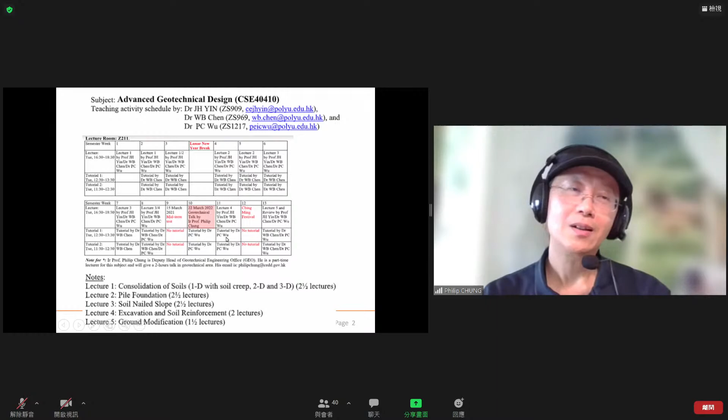Because he had already spent 5 more years than his classmates. Yeah, but anyway, his development in our office is very good, and he's actually the first one of his batch of graduates to be promoted to senior geotechnical engineer. Yeah, I saw his title. Yeah.

Actually, most of the graduates of his year, 2010 I think, most of them are geotechnical engineers. He is the only one that got promoted, after only 5 or 6 years of service in the geo. A very quick promotion, very quick.

Yeah, actually he's very smart. And Coco Yu, the graduate I mentioned to you, she graduated from Oxford University. Oh, Oxford, yeah, from Oxford. I also asked her, well, you studied a PhD for 5 years in Oxford, why join us as a graduate? She has to start from scratch, and undergo 3 years training and then 1 year in a responsible post before she can attend the chartership exam.

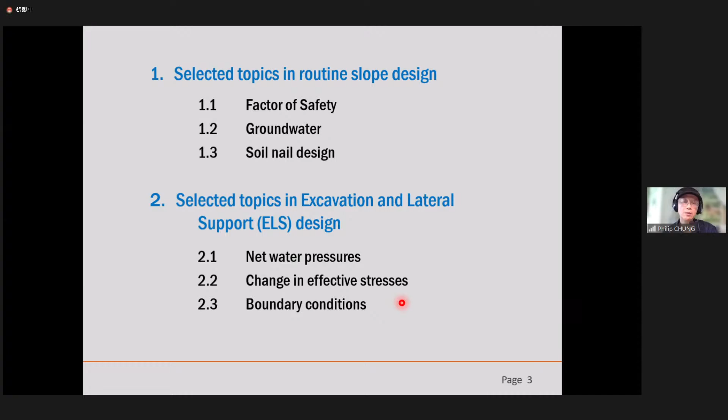In fact we use software in our routine designs, but there are many tricks. If we don't specify correctly, that will affect the reliability or accuracy of our results. All right, so that's the outline of my talk today. I plan to spend about 1 hour and 45 minutes on these 2 topics, or 6 subtopics, and leave the last 15 minutes open to all students for questions and answers.

All right, the first topic on routine slope design. Before I talk about the 3 subtopics, I first list out the standards and guidance for your reference, so that after you graduate from the Polytechnic University, whether in civil or geotechnical field, don't be panicked - there are lots of manuals, lots of guidelines to guide you on the design.

Here for the slope design, the Bible is the Geotechnical Manual for Slopes. I'm now actually responsible for updating this manual, the Geotechnical Manual for Slopes, and I will spend the next 2 or 3 years updating the whole manual.

In Hong Kong, according to the Hong Kong law ordinance and other regulations, all slope designs must be compliant with the Geotechnical Manual for Slopes. And if your slope is alongside the highways, we also have the Highway Slope Manual. We also have a series of Geo Guides relevant to slope design, listed out here.

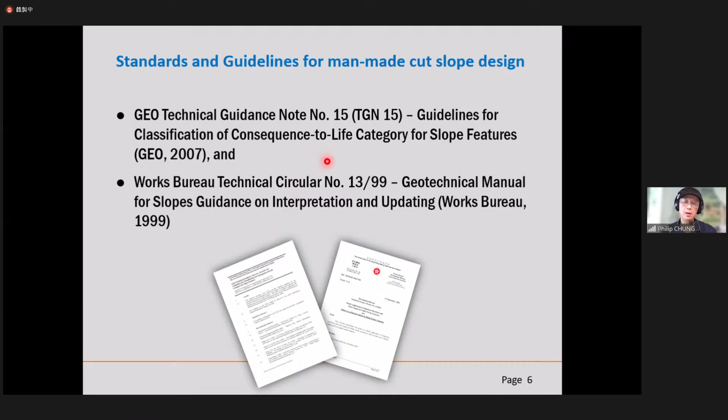Especially Geo Guide 7, which is a guide to soil nail design and construction. We also issue lots of technical guidance notes which supplement the Geo Guides and the Geotechnical Manual for Slopes. Some of these technical guidance notes or technical circulars actually replace the contents of the Manual for Slopes and all the Geo Guides. So we have lots of these Geo Guides.

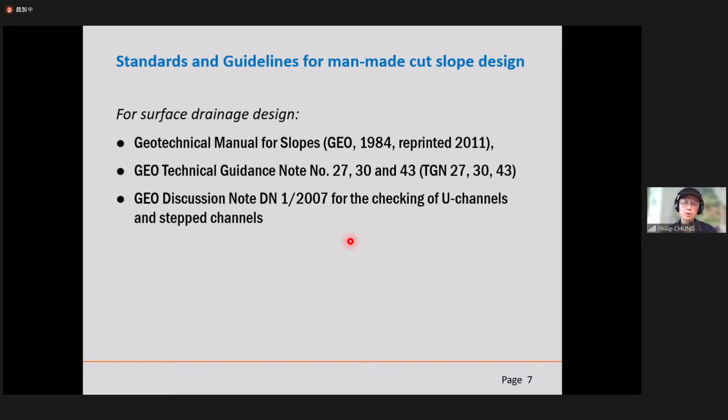On surface drainage design, we also have other reference documents. So there are lots of documents and guidance documents in hand to facilitate or guide you throughout the design process. Now let's first discuss the first subtopic I selected, which is the factor of safety.

First of all, the factor of safety of a slope, if you are engaged in slope design. In university, you are taught how to analyze the stability of a slope, normally through the limit equilibrium approach. That is, you may use the method of slices, whether it's Bishop's method, Janbu's method, Morgenstern and Price method, etc. You can finally come up with a factor of safety which indicates the stability of a slope.

In the design, you need to compare this analysis with a requirement: what is the required factor of safety for a particular slope? That is the minimum factor of safety required, and it is stipulated and specified in our Geotechnical Manual for Slopes. I would like to share this with you now.

But before I tell you what the minimum factor of safety required will be, you need to understand the concept. Our slope management and engineering design in Hong Kong is based on a consequence-based system. Now what does it mean by consequence-based system? I suppose most of you have heard about the term risk, right?

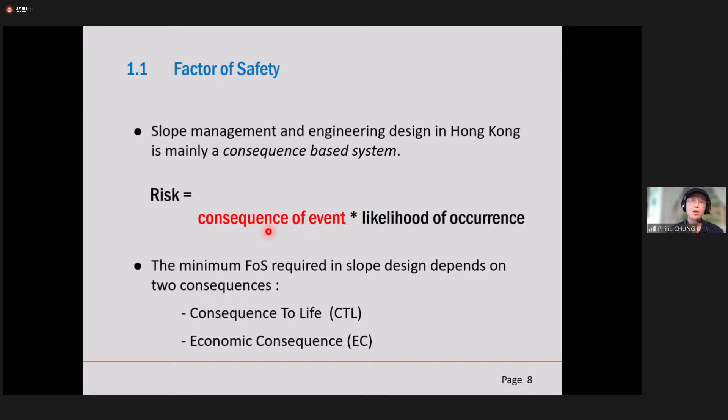So that's the requirement in Hong Kong for slope design. In the coming slides I'll show examples of category 1, under CTL, and also economic consequence category A. If you go to GEO Technical Guidance Note 15, there are lots of examples for the 3 different categories, but for the sake of explanation I'll only pick some examples to illustrate the important facilities under category 1 of CTL.

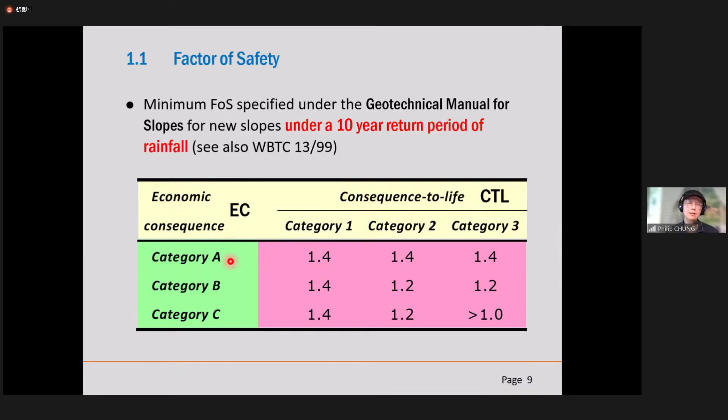Another slide shows examples of economic consequence - that is, should the slope fail, it would suffer economic consequence in this way. If the failure affects buildings causing excessive structural damage, or affects essential services, or major roads, etc., then this falls into category A of economic consequence. So in simple terms, if your slope affects important facilities - that is Cat 1 or Cat A - then 1.4 is the minimum factor of safety.

This is the first part about the practice in Hong Kong to specify the minimum factor of safety of your slope, and this shows examples of slopes. In Hong Kong, it's very common to have large slopes in close vicinity of buildings or major roads. Even though some of our slopes are not very high, especially compared with the scale in other countries or mainland China, because of their close proximity to facilities, buildings, and roadworks, a failure will affect the loss of lives and properties - and this is simply not acceptable.

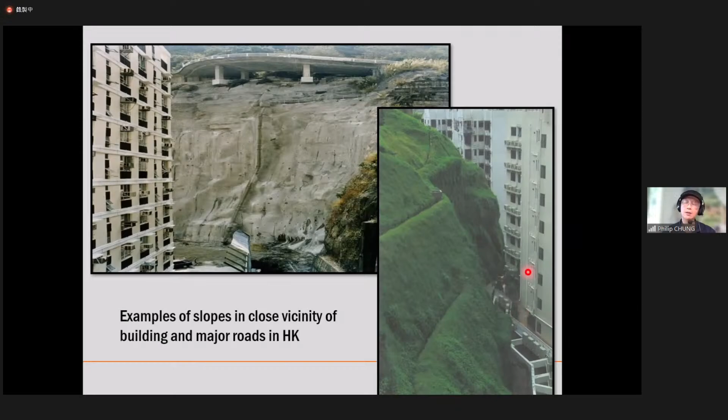Now we know the concept of categories, which we use to define the minimum factor of safety. But there's one more aspect to think about in practice: should the slope fail, would the failure debris affect facilities near the slope crest and/or slope toe? Even if my slope is overlooking an important facility, like a multi-story building, if the failure debris cannot actually reach the facility, why should we classify this slope as category 1? Even though the slope fails, it doesn't bring a concrete effect or damage to the facilities. So this comes to another concept - the travel distance, or in other terms, how mobile the failure debris is.

This depends on two things, which I'll show you later. One is the type of slope - whether it is a cut slope failure or fill slope failure. The second is the volume of failure.

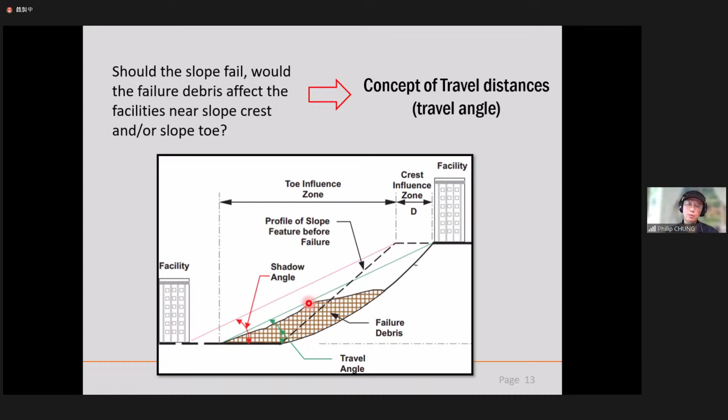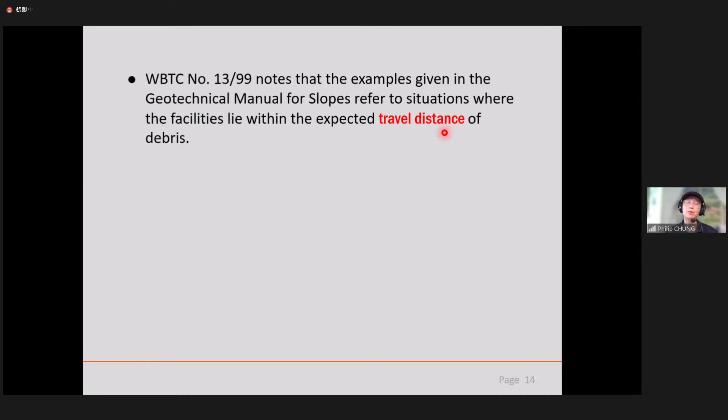In fact, all those examples, and also the table I showed you, refer to the situation where the facilities lie within the expected travel distance of debris. That is, when we say this slope is Cat 1, we have an implicit assumption that if the slope fails, it will affect the facility. So we expect the facility to lie within the expected travel distance. Now this is our implicit assumption.

But in fact, if your facilities, after estimating the travel distance, lie beyond this travel distance, then your category can be downgraded by one order. Initially, after initial assessment, you assign your slope as Cat 1, but later, when you find the facilities in fact lie beyond the expected travel distance, you may downgrade your category to 2. Now this may have a knock-on effect on the minimum factor of safety required. For Cat 1 it must be 1.4, but if downgraded to 2, it could be 1.4 or 1.2, depending on the economic consequence.

Now I want to emphasize this term, expected travel distance, because we have another term in the third bullet point, called extreme travel distance. So we have two travel distances: one is expected travel distance, the other is extreme travel distance. If your facilities lie even beyond the extreme travel distance, you can further downgrade your category to Cat 3. So your task is: once you have an initial assessment, say if it is a Cat 1 slope, your slope has to be designed for at least a factor of safety of 1.4, but please check the expected travel distance and extreme travel distance. In the coming few slides I'll show you how to check this.

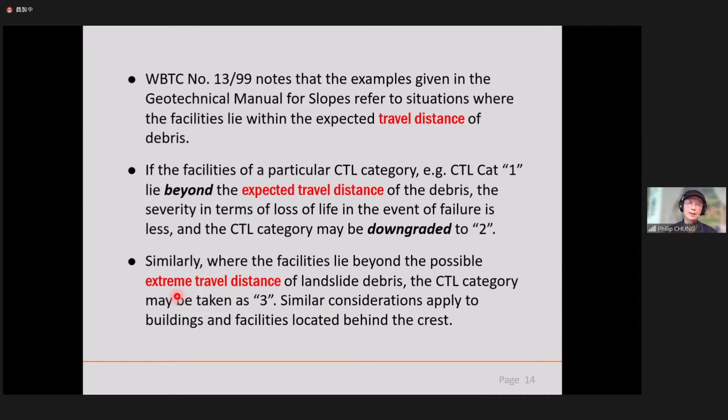For cut slopes, there are open circles showing the expected travel distance. Remember we have two travel distances: one is the expected, nominal one; the other is the extreme one, unlikely to happen. Expected is the lower bound, extreme is the unlikely case.

So the expected travel distance for cut slopes, we take as 35 degrees, and the unlikely extreme one is about 25 degrees. For fill slopes, shown as squares and black circles, they are more mobile, especially fill slopes that failed under liquefaction—very mobile. Our expected travel distance is about 25 degrees for fill slopes, and only 15 degrees for the extreme travel distance.

We have also seen that it depends on the volume. Based on judgment, we choose 300 cubic meters as a division line. This is what we call a relatively smaller volume, and larger than 300 is a large volume.

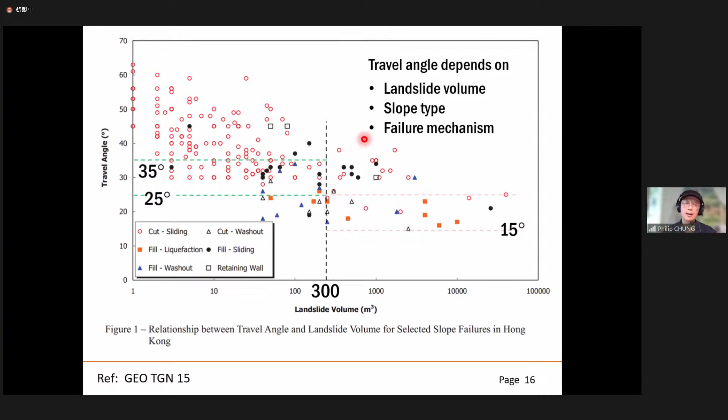With all this in hand, we can set up this guidance table. You can look up this table in our Geotechnical Engineering Office Technical Guidance Note 15, which gives you the travel angles of your slope. It consists of two parts.

The first part is the expected travel distance, and the second half, the lower half of the table, gives you the extreme travel distance.

So for your slope, see whether it is a cut slope or fill slope. If you're designing a cut slope, see what the debris volume would be if your slope fails. If the debris volume is smaller than 300, then your expected travel distance is 35 degrees, so you can draw a 35-degree line from your slope crest to see whether it will hit the facilities. If your debris volume is larger than 300, then you have to pick up 25 degrees, etc.

After checking the expected travel distance, you may then check the extreme travel distance to see whether your category can be further downgraded. Again, depending on whether it's a cut slope or fill slope, and depending on the volume of debris, you can look up this table to see which number you're going to adopt in your design.

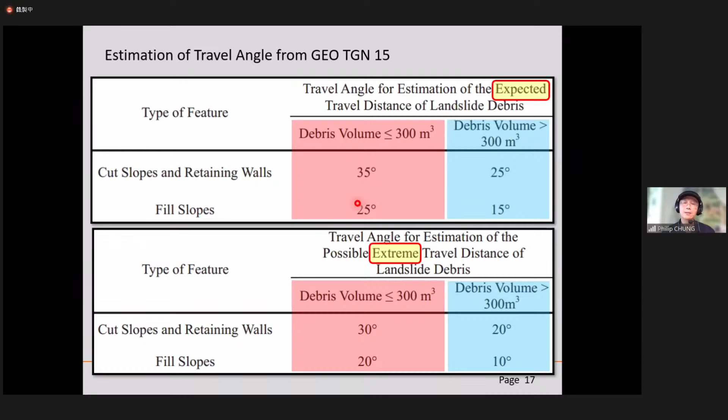Now, these are the ways we specify the minimum factor of safety. I think you have a copy of my PowerPoint, so to test your understanding of what I have just explained, I actually set up this quiz.

We have a cut slope with a slope height and also the clearance of the slope toe to the 6-story building. The question is, what will be the minimum factor of safety required under the current Hong Kong standard? You need to see that my slope is overlooking a 6-story building, so which category will it be?

And hence you look up the table - what will be the minimum factor of safety? Then you have to estimate the expected travel distance and extreme travel distance, to see whether we have a chance to downgrade or not. So you can go over the previous few slides to see whether you can come up with an answer - what will be the required factor of safety?

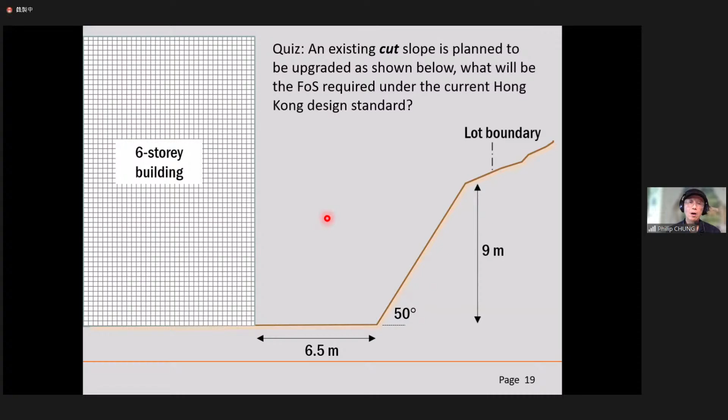All right, this is the first part about the minimum factor of safety. But before leaving this, I would like to draw your attention to some interesting features regarding the use of factor of safety in slope stability analysis.

Now, unfortunately, I don't have time to go over the details of these interesting features with you, but I just list them out here for your own reflection. When you have time, please think about this.

But the first thing I would like to point out is, do you know exactly the definition of factor of safety in slope stability analysis? This is also a question I ask candidates applying for the Hong Kong IE chartership exam, or in interviews in the recruitment exercise for graduate posts in government. Do you know the definition of factor of safety in slope stability analysis, the normal definition? Now, this is not the very special definition used in finite element method of analysis - this is the common definition used in limit equilibrium method of analysis.

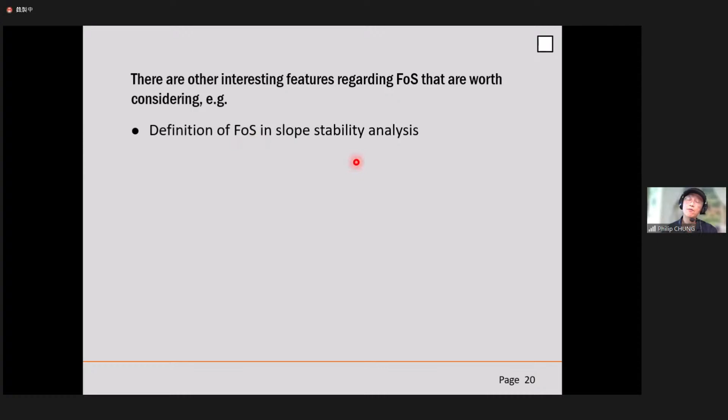So my question: in slope stability analysis, please be clear what definition you are actually using in defining this factor of safety. In fact, there is one common definition. Theoretically, according to this common definition, the slope will fail, or start to fail, at what we call incipient failure. At the start of failure, the factor of safety is 1. That is, if a slope has a factor of safety less than 1, then the slope fails.

But in fact, it is very common that we do analysis on existing slopes, to see whether they have sufficient minimum factor of safety or not. If an existing slope doesn't have sufficient stability, we need to upgrade it to the current standard. Now, we did a lot of analysis on existing slopes, and we noticed that many give a factor of safety less than 1. But most of these slopes are standing there without any failure at all. So this contrasts with our definition of factor of safety.

Do you know why? In fact, there are at least 5 to 6 common reasons to explain why a slope with a factor of safety less than 1 still stands without failure. If you are asked why, can you tell us at least 2 or 3 reasons? Undergraduate or postgraduate students should be able to give 5 to 6. Now, can you give us 2 or 3? This is the second point.

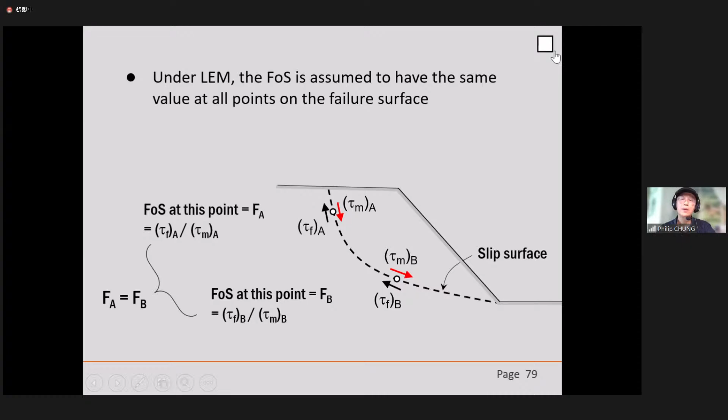Now, my question is — this is a very fundamental assumption in limit equilibrium analysis of slopes — why should we make this assumption? Is it true or valid? I can tell you the answer now: of course the factor of safety must not be the same at each point. I can tell you right away, as we can see from more sophisticated analysis, for example finite element methods and other numerical methods, factor of safety in fact changes from point to point. So what is the factor of safety that is given?

And the last one, a minimum of 1.5. Another slope gives you a minimum factor of safety of 2.0. Will you say that the slope with a factor of safety equal to 2 has a lower probability of failure compared with the one with a factor of safety equal to 1.5? Will you say that?

Now, I can tell you, you can't. Factor of safety alone cannot give you a full picture of the probability of failure. Then why on earth do we in our routine design only focus on factor of safety, but not the probability of failure? These are interesting features regarding factor of safety that, if you are interested, as an undergrad or postgrad, you can think about this.

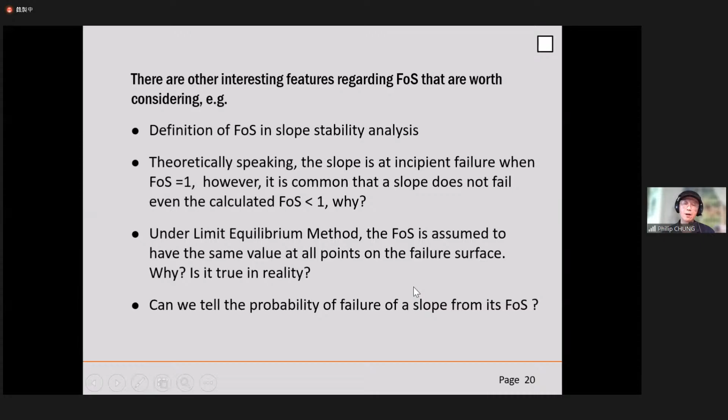So much for factor of safety. Now we turn to the second subtopic. In the table I have shown you on the minimum factor of safety, that depends on the categories, Cat 1, Cat 2, Cat 3, or Cat A, Cat B, Cat C. In that table, there is a note in our geotechnical manual for slopes, and also in the Works Bureau Technical Circular, which supplements the part on the geotechnical manual for slopes.

There is a note we particularly add in. What is this note? In addition to the minimum factor of safety of 1.4 for Cat 1 slope, this 1.4, as I said, is actually defined based on a 10 years return period of rainfall. On top of it, if you are designing a slope falling into category 1, you need to satisfy this minimum 1.4 factor of safety.

But yet, there is an additional requirement that you need to check the stability has a factor of safety of at least 1.1 for the predicted worst groundwater conditions. What does it mean? This 1.4 is satisfied if your analysis is based on 10-year return period of rainfall. That is, your design groundwater, which affects the pore water pressure, is coming from the 10 years return period of rainfall.

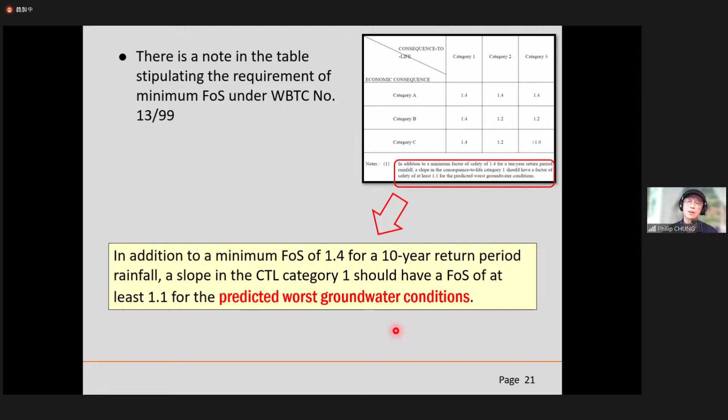That's why here comes my second subtopic on the design of groundwater level. This slide serves as a very brief introduction to remind you of the importance of pore water pressure in the stability of slopes. I hope most of you have learned the role of water pressures, especially when you learn the principle of effective stress. We use effective stress in obtaining the shear strength of soils, and that effective stress will be governed significantly by pore water pressures.

Here I show you an example: in an infinite slope analysis, infinite slope means a very long slope with constant angle, and the failure surface is shallow compared with the length of the slope. From an infinite slope analysis, depending on whether my soil has only cohesion, only friction, or is a C-phi soil with cohesion and friction, and depending on whether my soil is dry — that is, the groundwater level is located below the slip surface — or fully submerged, fully saturated with seepage, because this is sloping ground, when there exists water, there will be seepage.

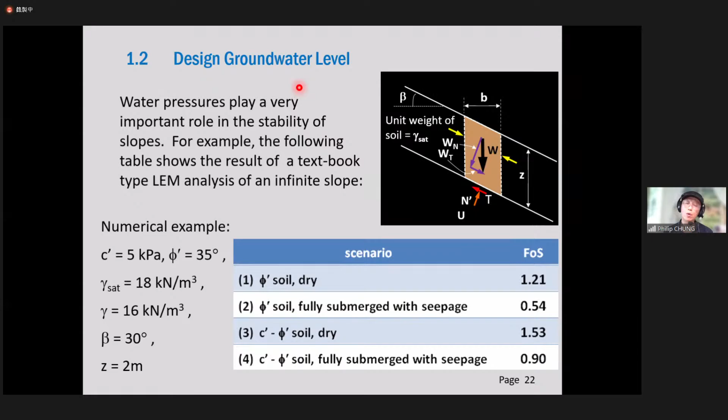So this groundwater estimation is very important in slope stability analysis. What is the standard or requirement on groundwater level in slope design in Hong Kong? In Hong Kong, the standard is very simple, just one sentence, which I highlight here.

Slopes in Hong Kong are designed for the groundwater conditions that would result from a 10-year return period rainfall. That is the requirement on the groundwater level. Now, for most new designers, they don't know how to do it. What I need is to design the groundwater level, but the standard tells you that you need to design your slope to cater for a 10-year return period rainfall.

I hope you have some concepts about return period. 10 years return period rainfall, in Cantonese, 10年一遇. You can imagine if you have to design for a 100-year return period rainfall, the rainfall intensity will be more significant, larger than a 10-year return period rainfall. In Hong Kong, we need to design for 10 years return period rainfall.

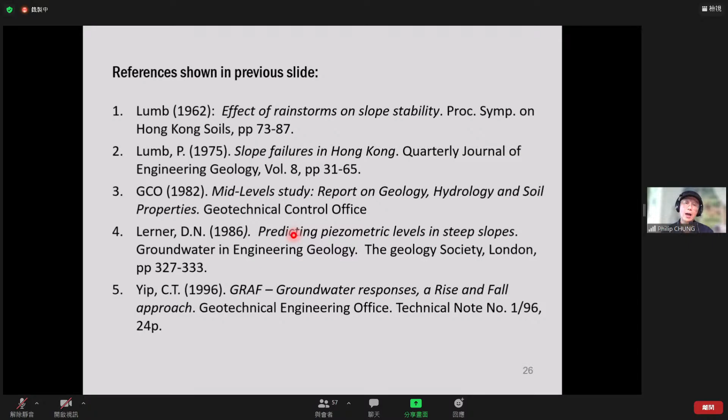Nowadays, we have 3 more commonly used methods. They are rough, approximate methods, suffering from many limitations, but yet they are analytical methods. I list out the references here. So if you have the chance to be involved in a real design, you may need to look up these 3 methods, which of course I won't cover here because of time.

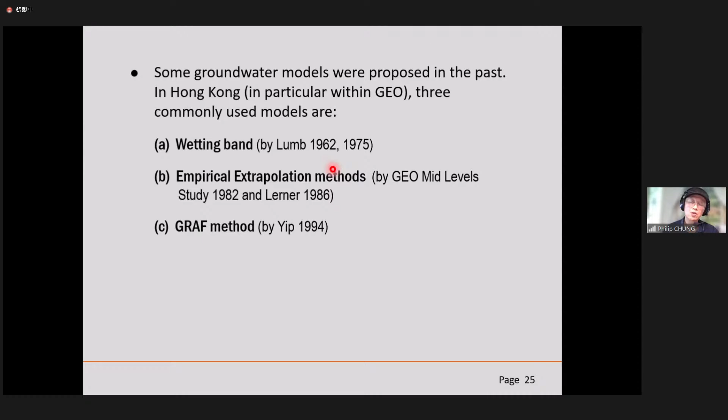Anyway, this is the design groundwater table. Now, I would also like to draw your attention to the fact that in addition to the main groundwater table, we need to pay attention to the possible occurrence of a perched water table. By perched water table, it means it is not the main groundwater table, but because of the contrast in permeability of different soil strata - for example, if you have porous material on top of less porous material, then upon heavy rainfall there may be a temporary buildup of water table because of the contrast in permeability. This is a temporary buildup of perched water, which is what we call a perched water table.

So in essence, in each stability case, you need to consider whether your geological model will allow a perched water table or not, because it also affects the factor of safety calculated. Perched water table.

I would like to share one interesting observation. I arranged a benchmarking exercise last year. What is this benchmark exercise? I invited the major local geotechnical consultants in Hong Kong to participate. I prepared 3 slope cases and asked them to work out their method of slope stability analysis.

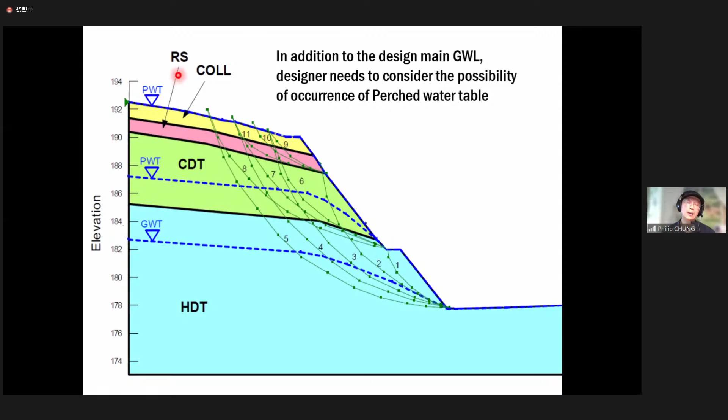For example, here I have 4 layers: residual soils, colluvium, completely decomposed tuff, and highly decomposed tuff. This is tough - how do you estimate the shear strength parameters, that is the c' and phi' of these 4 strata? Of course, most of them estimate the parameters from triaxial tests, from laboratory tests, but for the same triaxial test results, different people will interpret different results.

So we want to know how they interpret this. Thirdly, how do they estimate the design groundwater level? I organized this exercise last year and invited the major consultants to join, including AECOM, Arup, CM Wong, ESA, Fugro, Golder, Halcrow, Jacobs, Lambert, Mannings, and Maunsell. They are the main key players now in the geotechnical field in Hong Kong. I also invited 2 internal teams from GEO, one from our geotechnical projects, one from our landslip preventive measures project, so we also invited in-house people to join this benchmark exercise.

There are many interesting findings from this benchmark exercise on slope design, but because I'm discussing design groundwater with you now, I will just show you how they estimate the design groundwater in the next 2 slides, which is interesting.

In one slope, where the piezometer showed no readings of groundwater - that is, the main groundwater is well below the slope toe - those consultants and in-house designers opted to use empirical methods. Most of them chose the 1/3 slope height as an empirical rule, assuming the groundwater rises up to 1/3 of the slope height. Some used an empirical method by adding 2 meters on top of the piezometer tip, which they call the maximum groundwater level, so they add 2 meters on top of it.

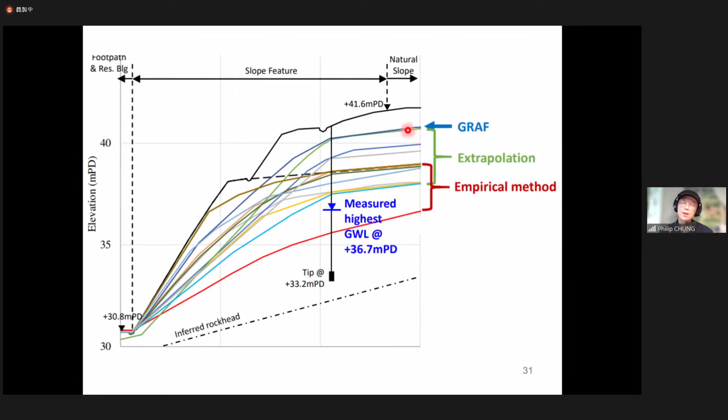An interesting fact is that you can see a wide range of variations from the local consultants and in-house teams. They are, as I said, the major key players in geotechnical design in Hong Kong - these few major consultants.

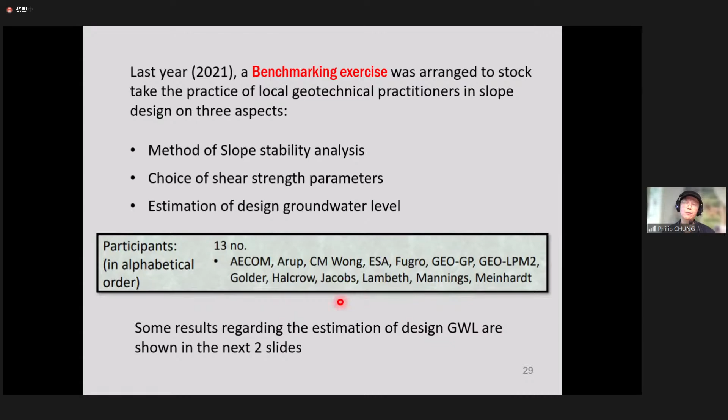This is our observation, and I would like to add some lessons to learn here. In the teaching of soil mechanics in universities, or geotechnical engineering subjects, foundations or other things, it is all too easy to leave students, even in their final years, with the impression that soil mechanics or geotechnical engineering is now an exact science, and that everything can be calculated. Especially nowadays, with software and complicated equations, it actually misleads you into thinking everything can be calculated.

In pure science, there is a very sharp distinction. I quote here from our father of soil mechanics, Karl Terzaghi, in his presidential address at the first international conference of the International Society of Soil Mechanics and Foundation Engineering, back in the 1930s: 'In pure science, a very sharp distinction is made between hypotheses, theories, and laws.' The difference between these three depends on the weight of sustaining evidence. The more evidence we have, the higher the status. If we have full sustaining evidence, then we call it a law. Otherwise, it is a hypothesis.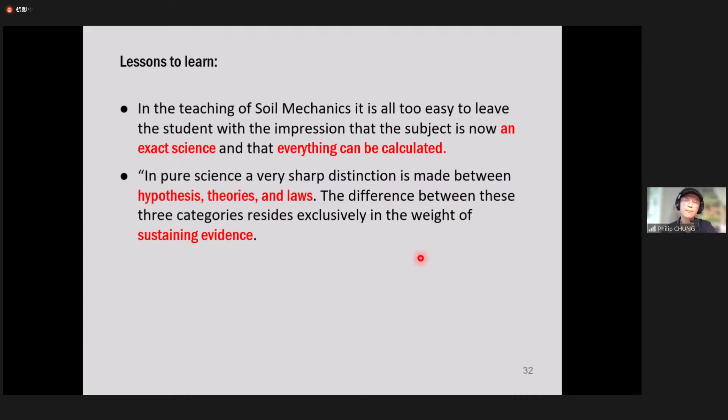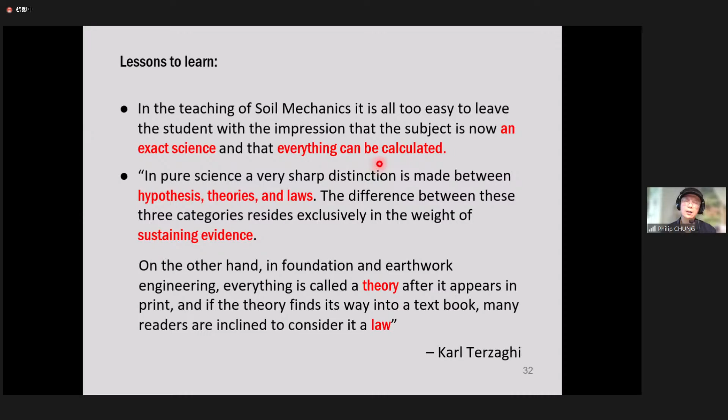However, in soil mechanics and geotechnical engineering, everything is called a theory once it appears as a paper in a journal or conference. And if this theory finds its way into a textbook, many readers will consider it a law. So please be careful and watchful about this - don't fall into the trap of thinking everything can be calculated and that our science is an exact science.

The third subtopic I would like to share with you is on soil nail design. Now, you have learned soil nail design and analysis, I think, in this subject - this was the topic of your lecture 3. Here, I just want to discuss something practical with you.

All the details about soil nail design in Hong Kong, from initial preparations down to detailed design, construction details, and site testing, can be found in GeoGuide 7. By now, I suppose you all know what soil nails are - a very simple device where we simply drill a hole, put a steel bar at the center, and grout it with cement grout. Then we build a soil nail head near the slope surface. That's it, a very simple device, yet it is very effective.

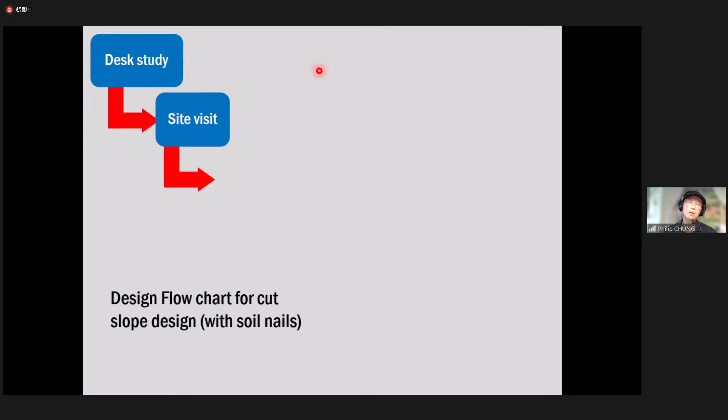You have to go through the desk studies. From the desk studies, you actually have a lot to study in the office before you come to the detailed design. And as a designer, you must pay a visit to the site to have a look at where your slope is located. Don't tell anyone you designed a slope without visiting the site - this is actually a fatal error. From the site visit, you gather lots of updated and more relevant information to supplement what you got from the desk studies. Nowadays we have lots of databases and documents we can actually retrieve.

We may also, from this desk study, take a look at the previous ground investigation and laboratory tests in the vicinity. After all this, you can plan your own ground investigations and site-specific laboratory tests to build up your geological model and design parameters.

This is a very important step in the whole design process and in our geotechnical design. The construction of a reliable geological model with reliable design parameters is a major part of the whole process.

I can tell you that 9 cases out of 10, we base our decision on the geological model. And I can also tell you that 9 failures, 9 landslides out of 10, come from a poor representation of the geological models, especially a poor representation of the design groundwater level. So I cannot emphasize enough the importance of this part.

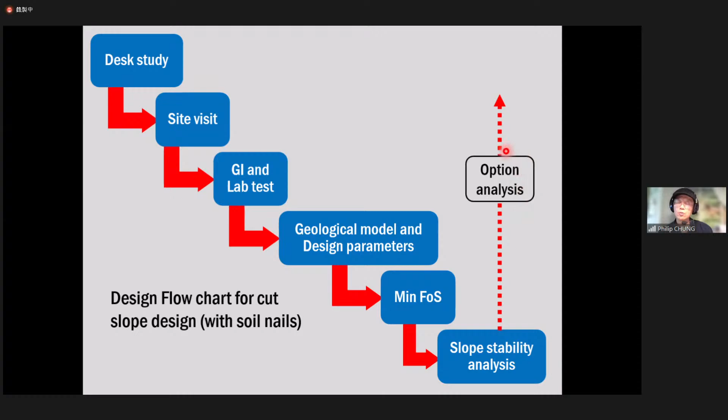When we have some site-specific GI and lab test data, we further enhance our geological models. Now, if we need soil nails or other things, we need to do an option analysis—how to make our slope stable to such an extent that it satisfies the minimum factor of safety.

That is, how to upgrade our factor of safety to the minimum factor of safety. There are many options—soil nails are only one of them. You have to think about other options. For example, for slope stability, you may cut it back, that is, lower the slope angle. You may do the cutback, which was very common in the 1970s and 1980s. But nowadays we don't recommend this method due to various reasons.

But this is still one of the options if available—cutback, or you can build a retaining wall at the slope toe so as to lower the slope angle. You have many options. You may also install ground anchors, etc., or you may use cement soils to strengthen a fill slope.

You may have lots of options, and you need to analyze various options. You need to consider the economic cost—which one will be more expensive, which one is cheaper—and you need to consider the duration, that is, the time for construction. If one costs 9 months and another takes 2 years, which one will you opt for? You need to consider any construction difficulties, and any know-how, knowledge, or techniques available locally. You need to consider lots of things.

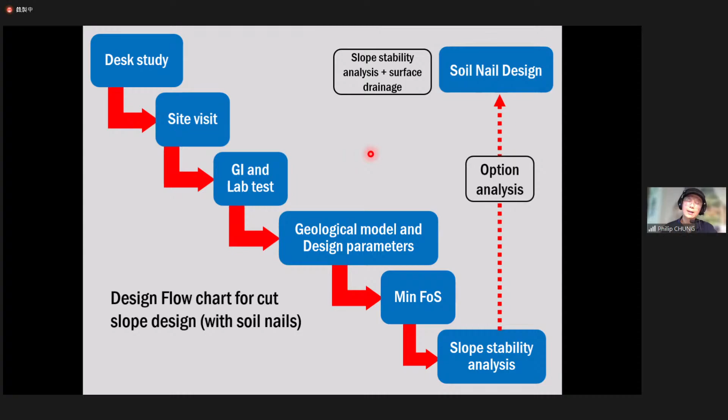I extract this from GeoGuide 7, which shows some typical failure modes. We need to understand the failure modes so that we can design properly to guard against them. That's why we need to study the failure modes.

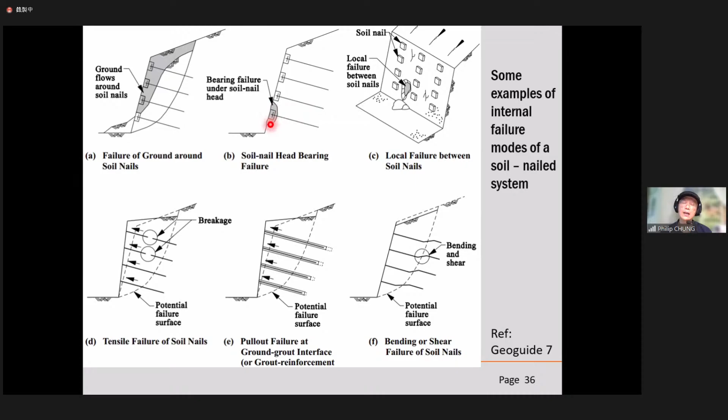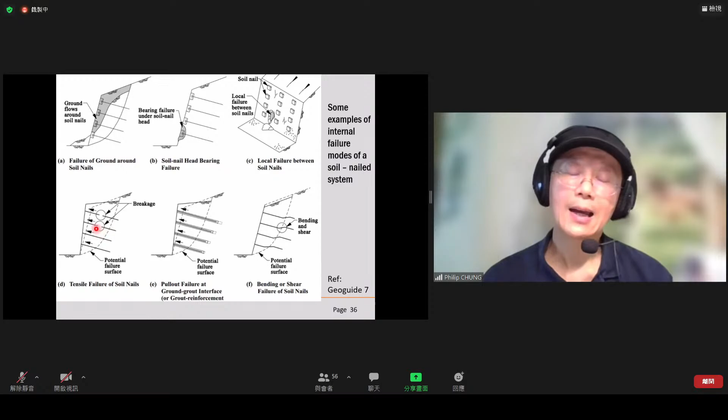For example, the soil will flow around the soil nails - bearing failure - so we need to design the soil nail head. There could also be local failure between soil nails, which is normally guarded against by the center spacing of the soil nails. You need to know there could be tensile failure due to breakage of the steel, so you need to design against that. Or the grout and soil interface bonding is not sufficient, so the whole nail will be pulled out - we need to guard against this grout-soil interface failure as well.

And there could be bending and shear failure, especially at the juncture of the slip surface.

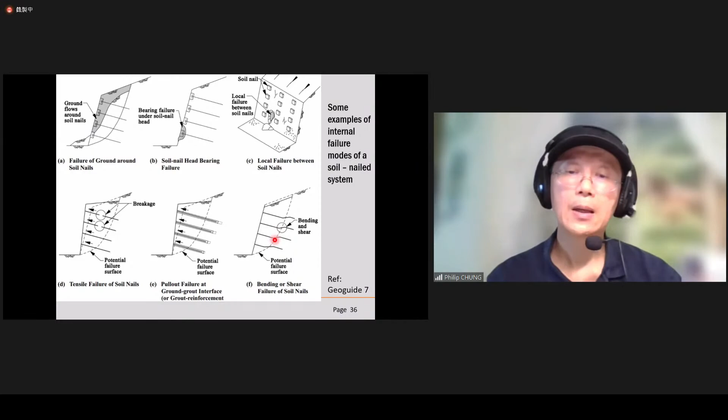Here I list out the general design considerations, which I will not go into detail with you - I just list them briefly. We need to consider stability.

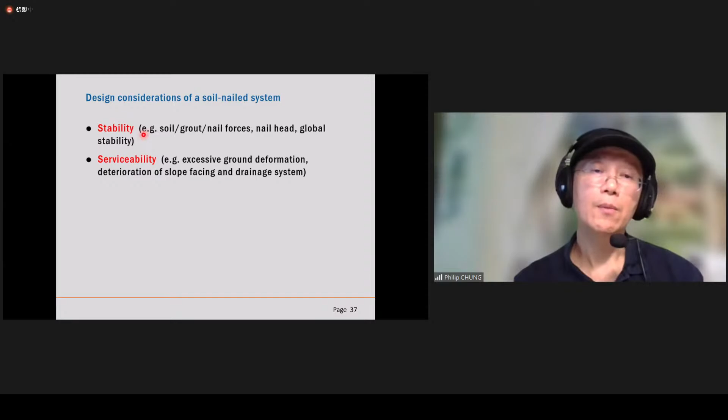For most graduates, you need to learn the subsequent bullet points normally during on-the-job training - that is, when you join a consultant, a contractor, or a government department. When you're actually involved in the design process, you'll be heavily involved in other design considerations, not just stability. In university, most of you learn about the stability calculations, but in reality, in practice, we need to consider others as well.

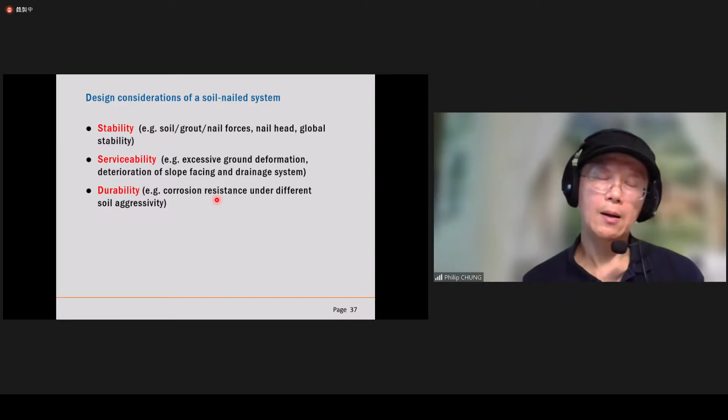Equally important is serviceability - we need to avoid excessive ground deformations, etc. The drainage system. We need to consider durability, whether the soils surrounding the soil nail are corrosive - we need to assess the corrosiveness. In GeoGuide 7, there's a table to assess corrosion. If it falls into different categories of corrosion environment, we have corresponding remedial measures to guard against these aggressive soils. So we need to consider durability, and we need to consider economic considerations.

Nowadays this is actually satisfied very easily. Why do we so often use the soil nail system in Hong Kong? One of the reasons is economic considerations - because it is buildable in Hong Kong, and the local know-how, technology, and skills are very, very mature.

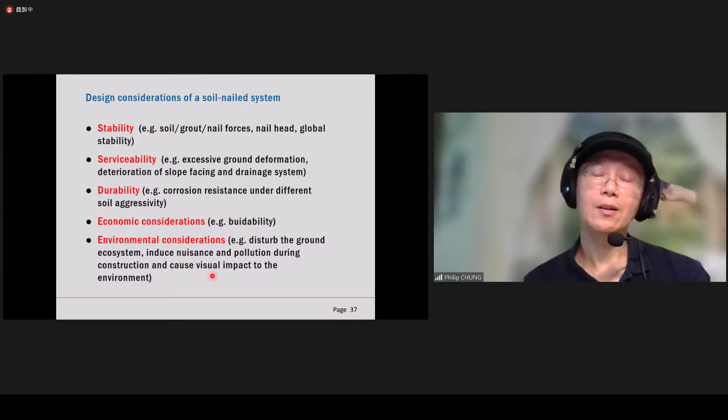We also need to consider any environmental impact to the surrounding area, especially during the construction of soil nails. Some of our cases in the past, we at last dropped the option of soil nails because it induced such nuisance that cannot be remedied - we cannot introduce remedial measures to combat or minimize the nuisance, especially the noise generated. In some areas, it is totally not acceptable at all. So we need to consider environmental considerations.

Now here I show you examples - you don't need to be bothered by the details, I just want you to get a feel. Here is a soil nail slope with two layers: CDG, completely decomposed granite, on top of the highly decomposed granite, then overlying bedrock.

Initially the factor of safety is 1.24, and the minimum factor of safety required is 1.4, so we need to install soil nails. Here we install 9 rows of soil nails. After installation, the calculated minimum factor of safety obtained is 1.41, which satisfies the minimum requirement.

This is designed based on a groundwater table satisfying the 1-in-10-years return period, which satisfies our Hong Kong standard. This is about 3 meters above the bedrock, and the nail forces are shown here.

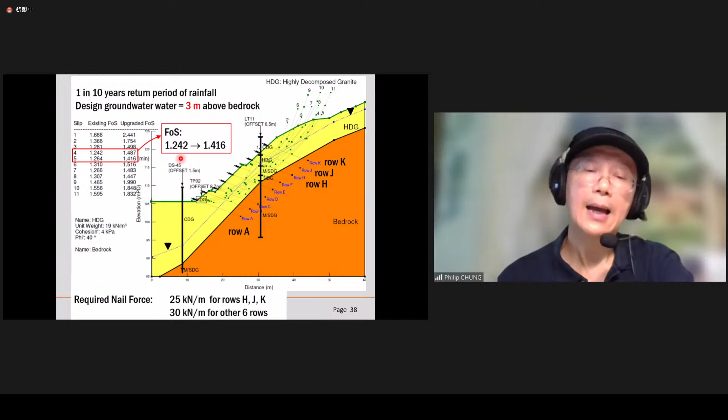Actually, the calculation of the nail force is the most easiest part, as I will show you later. And as I said, if this is a Cat 1 slope, you also need to check whether this soil nail slope will give you a minimum factor of safety of at least 1.1 under the worst credible groundwater conditions.

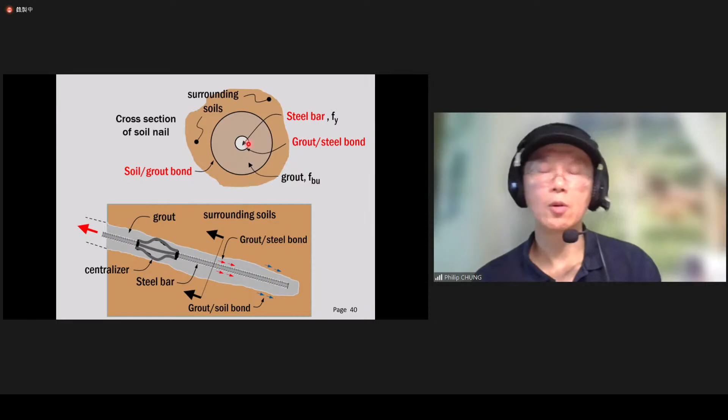And the third part, whether this grout and steel bond is sufficient or not. Otherwise, the steel bar will be pulled out - the slippage. So make sure this steel-grout bond is okay. We need to check these 3 parts, and from these 3 parts, the minimum one, the governing one, will tell us the soil nail capacity.

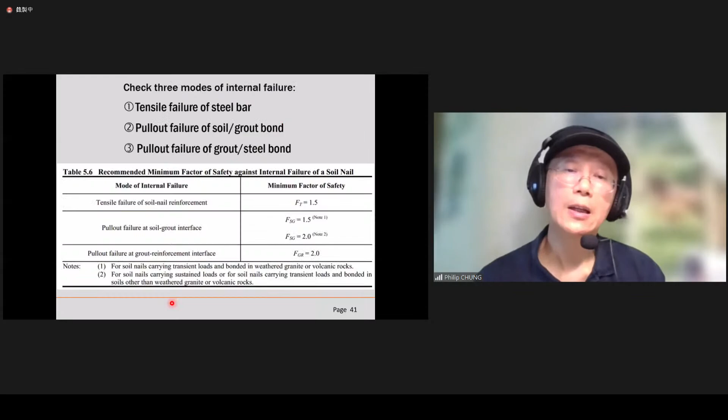So to design for these 3, we need to design for a factor of safety. Here you see very different definitions for different failure modes. For the tensile failure, we need to design for 1.5. For soil-grout interface, depending on whether you are in the CDG or CDV, the factor of safety could be 1.5 or 2. And the steel-grout bond, the factor of safety is 2.0. So you need to guard against these 3 failures, from which the minimum load gives you the capacity of the soil nail.

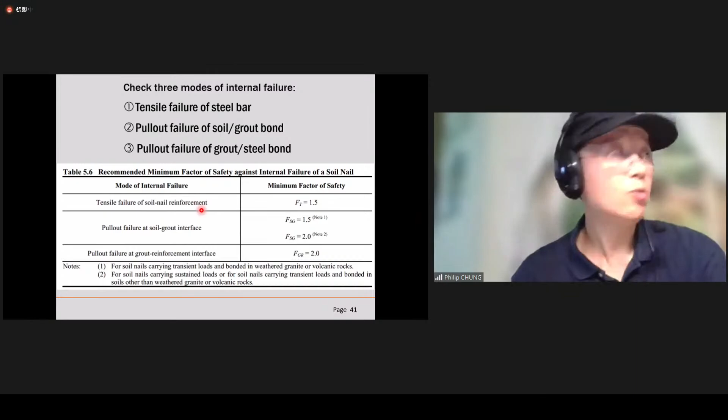Now, I will not go through the details of the design. I just list here, say the tensile failure, how to do it. The principle is very simple. I'm sure you must, and you should have no difficulty understanding it if you go through it. And an example is given.

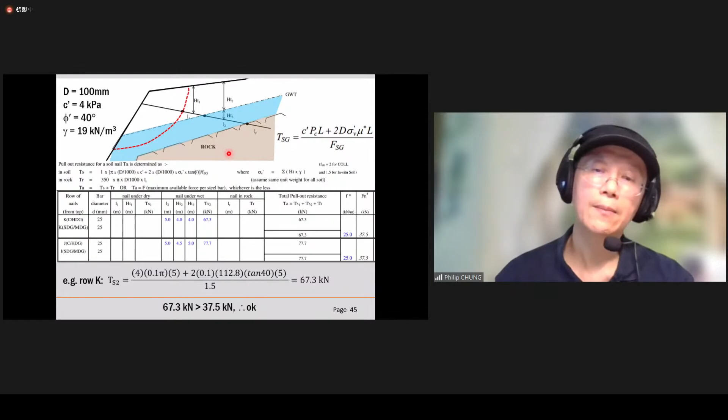And okay, the second part, the soil-grout bond, the equation is given. Also, it comes from very simple physical considerations and from effective stress considerations. And here I show you an example of how, in real life, in the design office, we do it using an Excel spreadsheet.

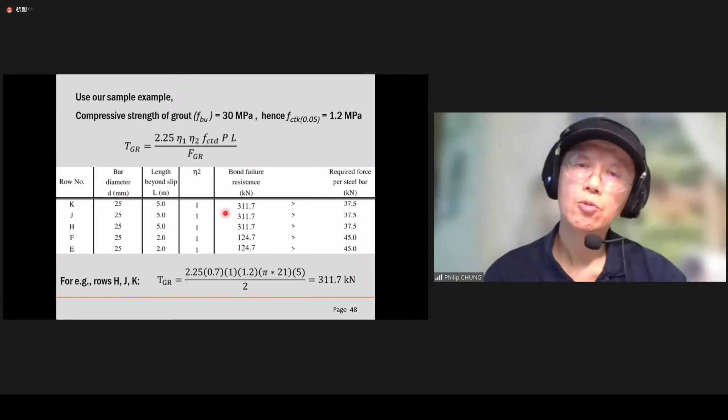And also the final one, the steel-grout bond - the equation is given, and again I showed you an example. As I said, I will not go into details, but in real design, you can follow this and work out your soil nail force - these soil nail forces. And once you have the soil nail forces, you can perform the stability analysis to see whether you attain the minimum factor of safety to satisfy this.

Now, what is the lesson to learn here? The lesson to learn, I hope you can understand this - I hope most of the graduates can recognize and maintain a good balance between education and training. What does it mean by education and training? Actually, I roughly say that education means what you learn from the universities, and training is what you learn from on-the-job training. In fact, they involve the basic theories and principles which you learn from universities, and the local practice in accordance with laid down standards and experience and empirical methods. So you have to combine these two, maintain a good balance before you can make a sensible design.

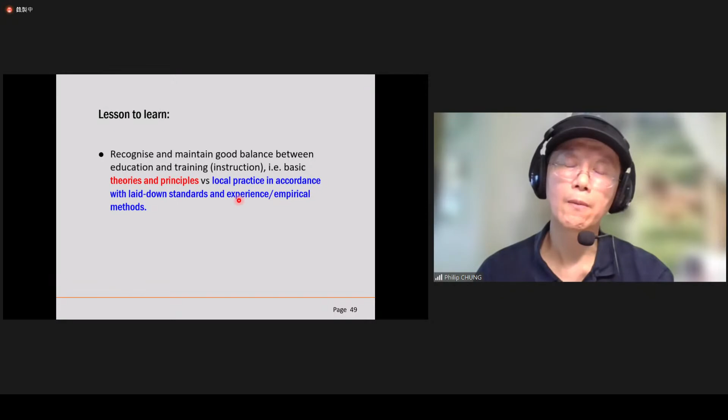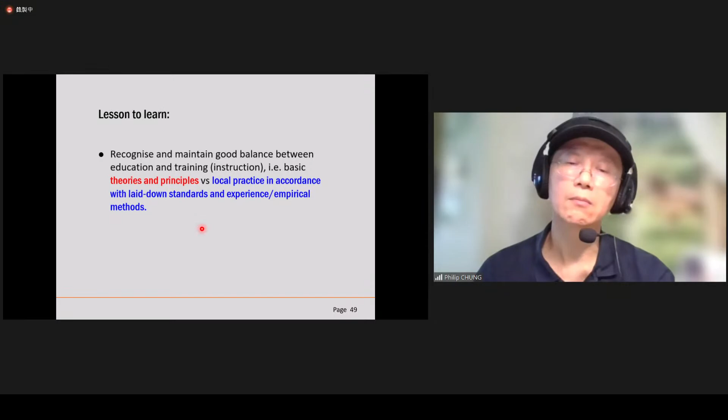Blindly following local practice simply implies that you are not an engineer at all - you just blindly follow the book. But only understanding the theories and principles cannot enable you to do an appropriate design, because our geotechnical engineering is not an exact science, and not everything can be calculated. You need to rely on experience and empirical methods. So you need to maintain a good balance between them.

Now I think it's almost the most of the materials I cover for the first topic. I include these coming 4 slides just to remind you that if you use soil nails in slope design, in fill slope design...

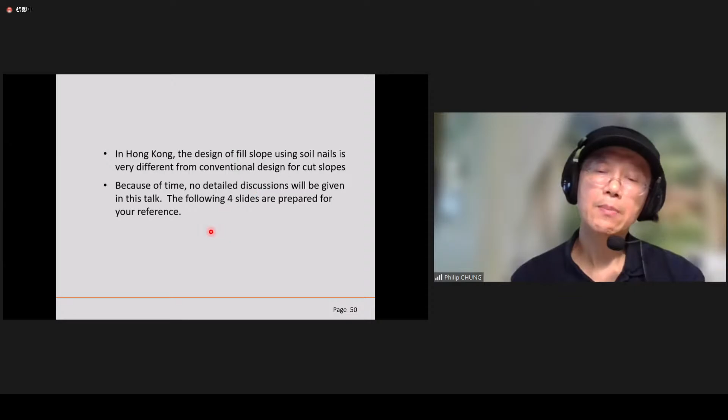What I have just mentioned to you is soil nails in cut slopes. But if you use soil nails in fill slope design, from theories and from practice, they are very different from cut slope design. I don't have time to discuss the theory and practice of soil nails in fill slope design in detail, but in case you have an opportunity to design fill slopes using soil nails, I prepared the following 4 slides for your reference, which I will not talk about in detail.

In fact, our goal is given by this: the stress path is moving from point A to B, which is under a drained path, and then undrained failure. We actually use this as a basis for our design.

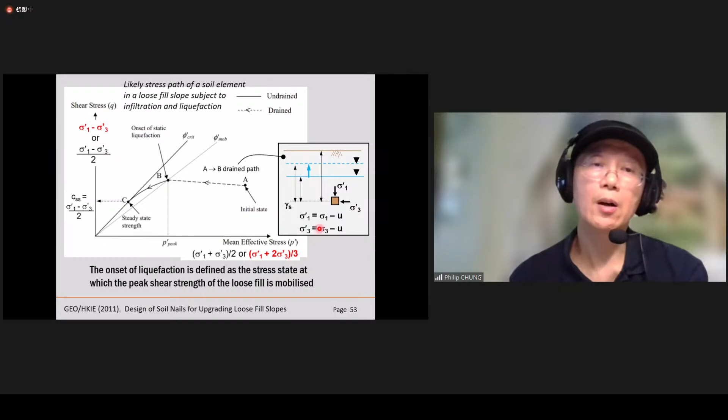So if you have learned all this soil mechanics stuff, now it's good to test whether you understand this basic behavior—why we have a drained path horizontally moving from A to B, and why the undrained stress path for loose fill materials looks like this, then comes to the steady state. Test yourself on what you've learned in these 4 years regarding liquefaction, steady state, and undrained shear strength.

The design process is a bit different from cut slopes because it involves the design of a grillage, and we use the pressure on the grillage to design our soil nails. That's why it involves undrained design, and after that we go back to the drained design. So the design of soil nails in loose fill involves drained design as well as undrained design—so it's a bit more difficult than cut slope design. Just so you know, these are 2 different philosophies.

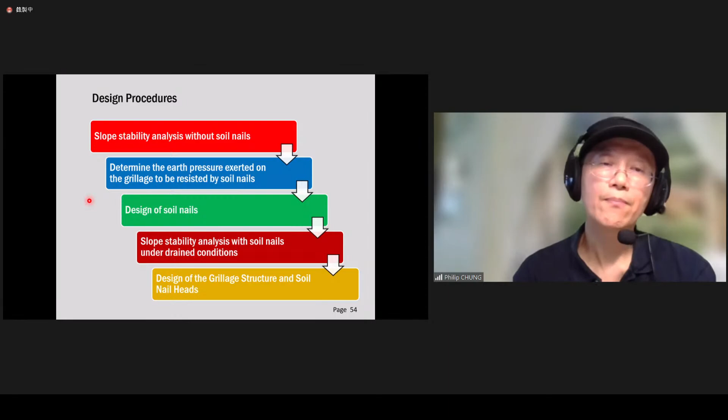Now, in the coming 15 minutes, the last 15 minutes, I will quickly go through these topics with you on ELS—excavation and lateral support. The 3 topics: the first one is about net water pressures.

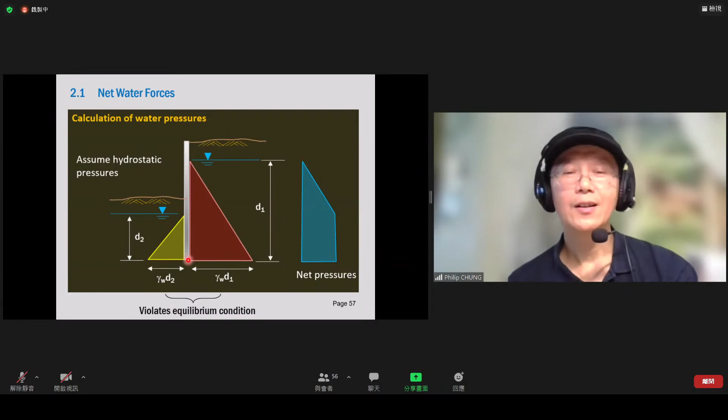Before I turn to the second page, you can see that at this particular point, at the base of the retaining wall, the pore pressure on one side is gamma W D2, and on the right-hand side, gamma W D1. They are not equal to each other, which violates equilibrium conditions. At a particular depth, the water pressure all around must be the same, so this violates equilibrium as well.

This condition only occurs or is applicable in examples like this one, where the retaining structure is embedded into very impervious soils, such as clay, or into bedrock. Then we may assume this net hydrostatic pressure, like this. This is only applicable in practice if your retaining structure is embedded into something that prevents any seepage between the right-hand side and the left-hand side.

When there is seepage, you cannot design according to this hydrostatic pressure, that is the blue dotted line. Instead, you need to design assuming there is seepage. This is the resulting pore water pressure acting on the right-hand side, the active side, and the pore water pressure acting on the passive side. The key is that the pore water pressure at the base is the same.

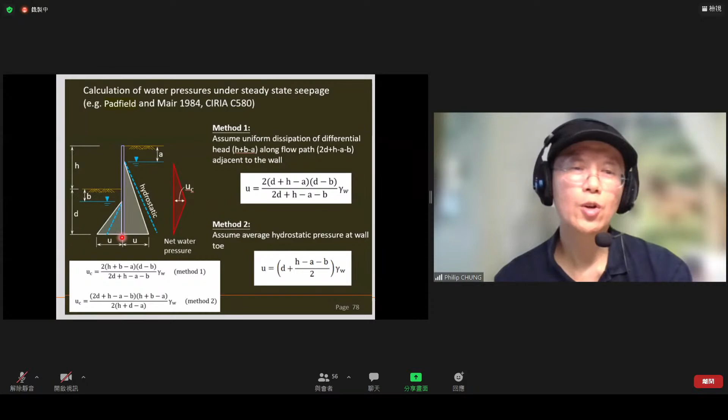So then you make them equal, divided by 2, and simply draw a straight line to connect them. This is the second method, assuming the average hydrostatic pressure at the wall toe is the same. So you simply get this, a very simple method. But the first one is more logical and follows the real case more closely. It comes from a seepage consideration using Darcy's law, from the hydraulic gradient point of view. This U, you can test by yourself: if this is a hydrostatic pressure, you add them together and divide by 2 to get this equation. Please test this yourself to see whether you can obtain it.

But for this one it looks complicated, and I will tell you how to do this. This is the net pressure. Because at the bottom these two are equal, the net pressure at the bottom is 0, so the maximum is somewhere here. This maximum U is again given by equations which you can derive yourself.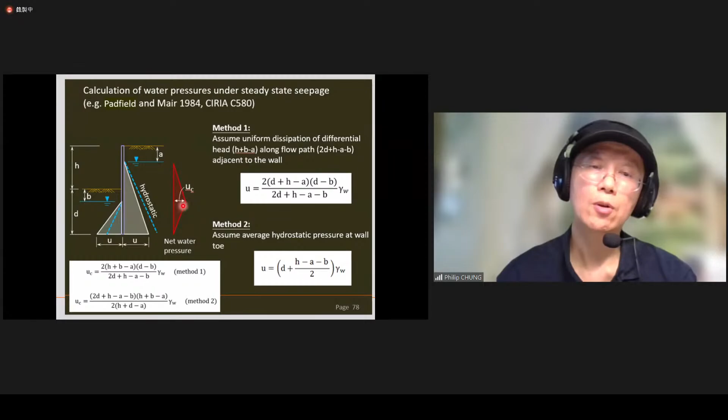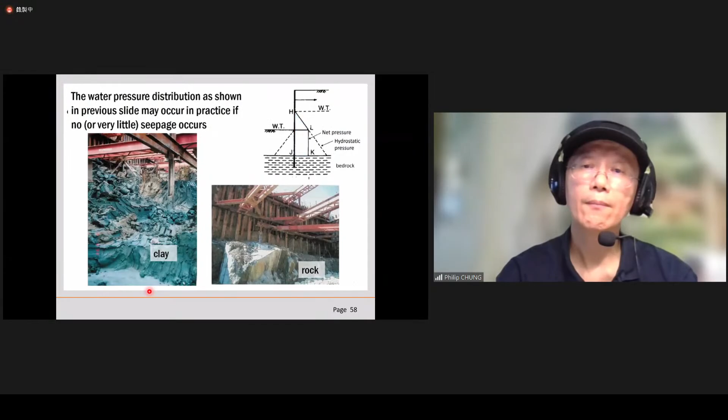So in reality, we do it either by this equation to obtain the net pore water pressure, or we make use of software. Here I show you one of the common software we use, SEEP/W. Here I show you the calculation. This is the net water pressure if you assume static conditions. But if you consider seepage, using the equations given here, it will give you this black curve. So this is triangular, as I showed you.

If you use a software, say SEEP/W, then it gives you the distribution very similar to the Padfield and Mair equations. Okay, so this is the way we design net water pressure.

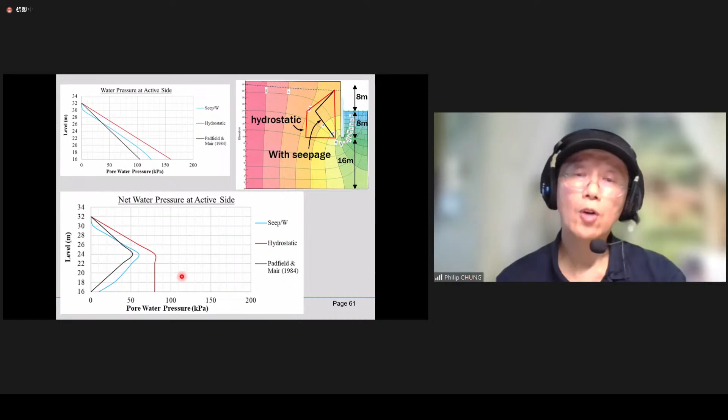Now, a consequence to this is that there will be a reduction in pore water pressure if you consider seepage. When there is a reduction in pore water pressure, it means that there will be an increase in effective stress. Remember this? That's why I discussed this second subtopic with you, change in effective stress.

Remember from principle effective stress, it is coming from total stress minus pore water pressure. Now, you don't rely on the static pore water pressure. Now you use seepage to come up with your net pore water pressure. A reduction in U means an increase in effective stress.

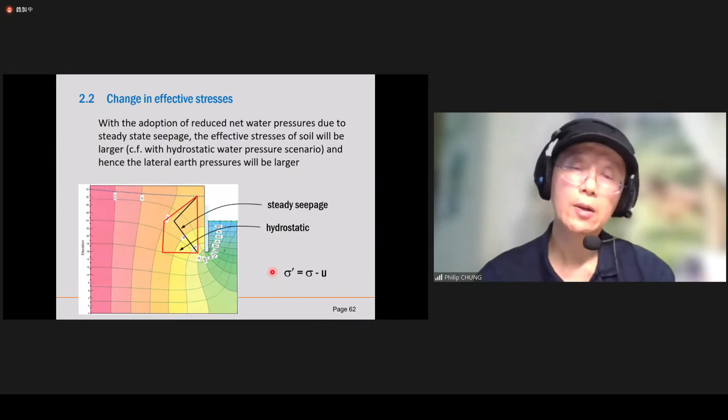Now this point is very important and sometimes forgotten by the designers. And here I show you this. If you use static pore water pressure, then your effective stress will be changing like this. There's the change in effective stress behind the retaining wall. This gives you this line.

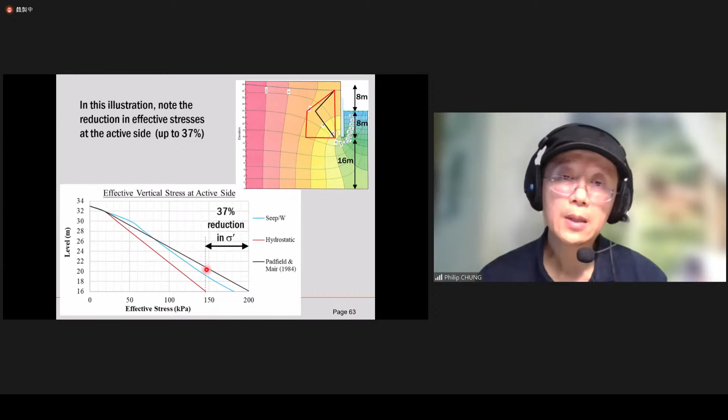And if you use a seepage condition where you have a reduction, then this will be your increase in effective stress. So by assuming a static one, you will have a reduction in effective stress calculation, which is unsafe. You underestimate your effective stress.

Now, why is it unsafe? Here I actually show you an example. In the design of a wall, if you assume seepage is not considered, then here I have this 5.4 meter. That's good, 5.4, very conservative one. And if I allow seepage, then because of the reduction in pore water pressure, my embedded depth will be shortened, so a more economical design.

But the designer here forgot the increase in effective stress. If you don't consider the increase in effective stress, he actually comes up with this: 2.3 meter. Forgot the effect of this effective stress, 2.3 meter. Now if you really believe that this 2.3 meter is your final product, but without correcting for the increase in effective stress, then this is a very unsafe design.

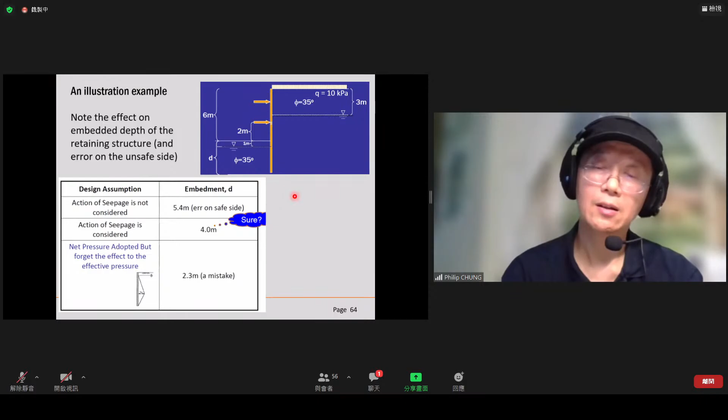Now I just let you know the consequence, okay? But the detailed calculation, well, you can consider it later. Now, and the last one, maybe I'll finish it in 5 minutes. There's the boundary conditions. Now what's the boundary conditions?

Now, I have a deep excavation like this, okay? Initially, we have the original groundwater level. Now, because of the excavation, I have to pump away the pore water pressure inside the excavation, for the building of the foundations, for the construction of the basement, whatever.

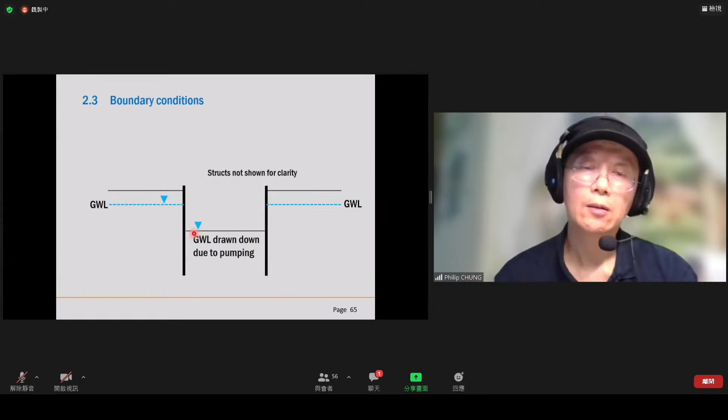Now, the groundwater level is drawn down to this level. Obviously, water will seep from the left-hand side to the right-hand side, and from the right-hand side to the left-hand side, symmetrical. And because of this head difference, there will be seepage.

Now, my question is, normally you will do this kind of seepage analysis. We need to do this to see whether the embed length is sufficient or not, to see whether there will be piping conditions, that is this quicksand condition, piping condition, to check against any kick-out failure. Now we need to do a seepage analysis. Of course, nowadays you will use software.

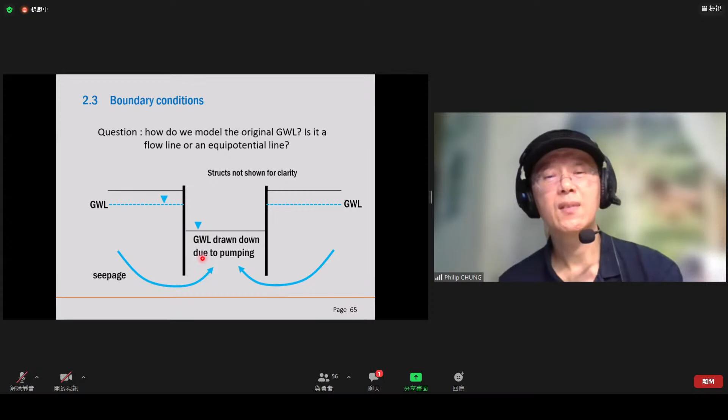In modeling your seepage analysis, my question is, how do you model this original groundwater level? Do you model it as a flow line or an equipotential line? I'm not sure whether you still remember your seepage analysis, the flow net.

But I can tell you that in reality, in 99% of the design of the ELS, we don't model it like this, but we model it opposite. Now remember this, this is the equipotential lines, but we model this as flow lines.

And this is the equipotential lines. Okay, we model it differently. They actually give you very, very different results because the whole flow line are different.

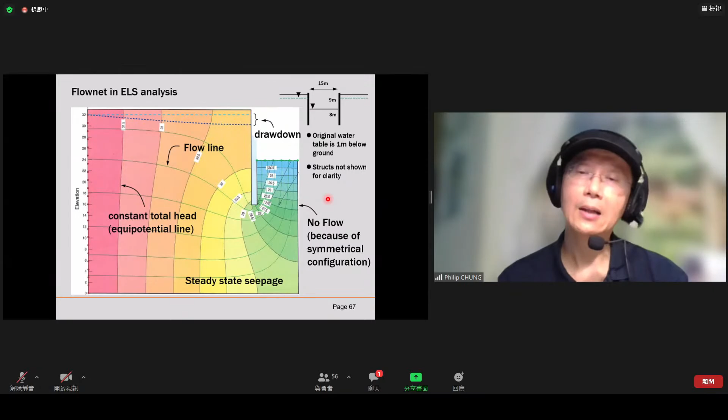So we cannot model it like this. Some designers make these mistakes. I actually copied this from our GCO publication 1/90. It tells you what I told you, the two very different flow nets - one models this as equipotential line, and one models this as flow lines.

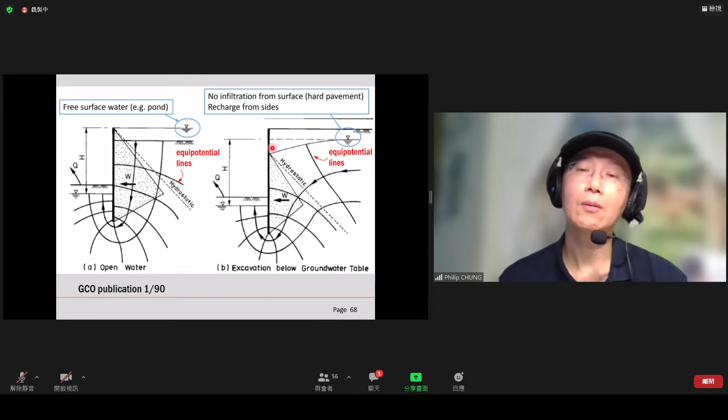Another issue is about this extent of influence zone. In the software, I know the excavation depth, I know the embedment depth, but what will be this extent of influence zone? How large should I consider in a computer software - should it be the same as the total length, total depth, 2 times the total depth, or what?

This influence zone is very important to affect our calculation of the drawdown. This drawdown is very important because this drawdown of groundwater level will cause settlement of the surface. And if we have important utilities and buildings, then they will suffer from these settlements. So it affects our calculation of settlements, and our distribution of net water pressures.

I will show you an example. This will affect our calculation of settlements, as I said, the hydraulic stability because of change in net water pressure. It affects our adequacy of this embedded length. So how to define this is very important.

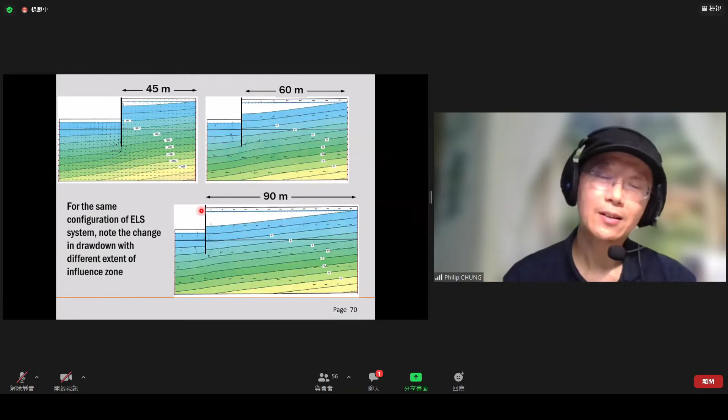If you consider this as 45-meter length, then this will be your drawdown. But if you consider a 60-meter extent, your drawdown is larger. And if you consider 90 meters, even larger, the drawdown. So it significantly affects your ground settlement calculation. So which one, or actually how large should I consider?

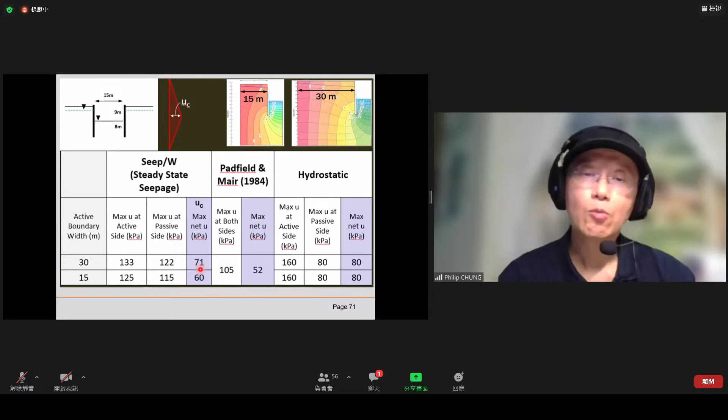Different sizes of influence zone affect our pore water pressure distribution magnitude. That's why I say it affects the magnitude of drawdown and distribution of net water pressures. In the subsequent slides, I tell you how we arrive at reasonable recommendations, which I will not go into in detail. You may read it by yourself - by considering all this, we think an influence zone about 2.5 to 3 times the excavation depth will be okay.

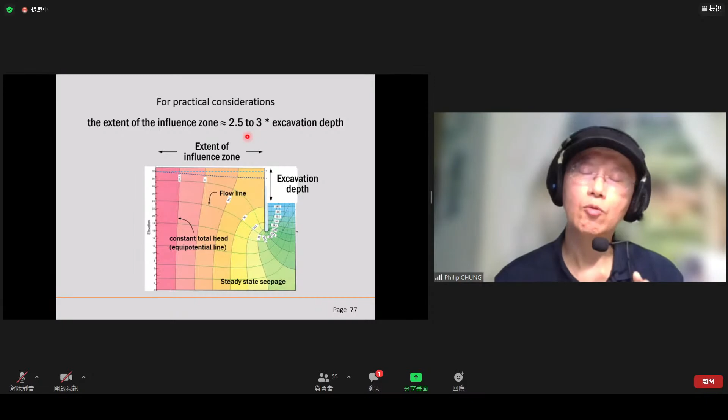This again illustrates the balance between education and training. This, I hope, illustrates you need to know some knowledge about the seepage theories, about some research papers, but at the same time about the practical considerations, to come up with a reasonable design guidance. So thank you for your attention, and I still have